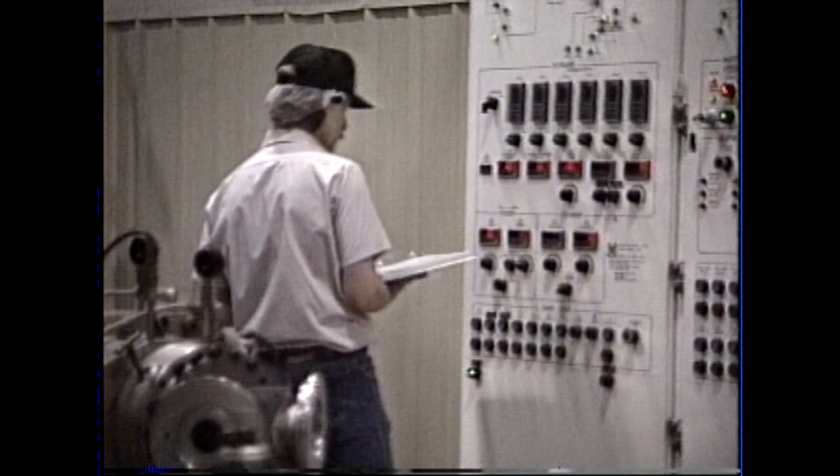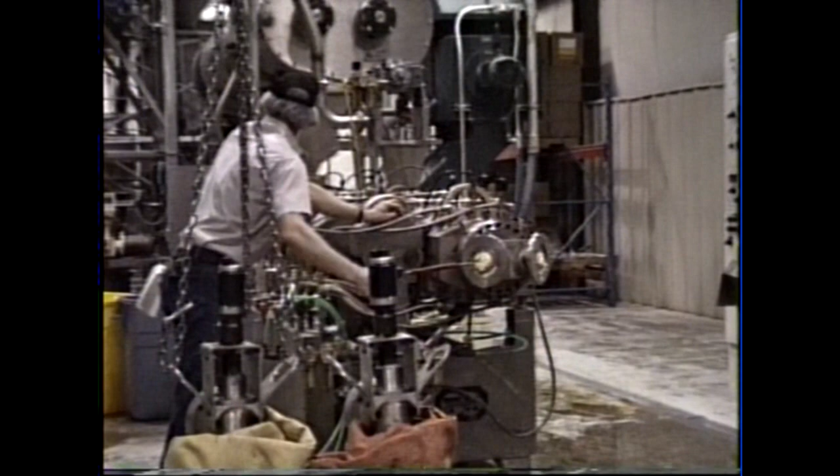I like to watch their buttons. If they were in G-strings, it'd be a lot better.

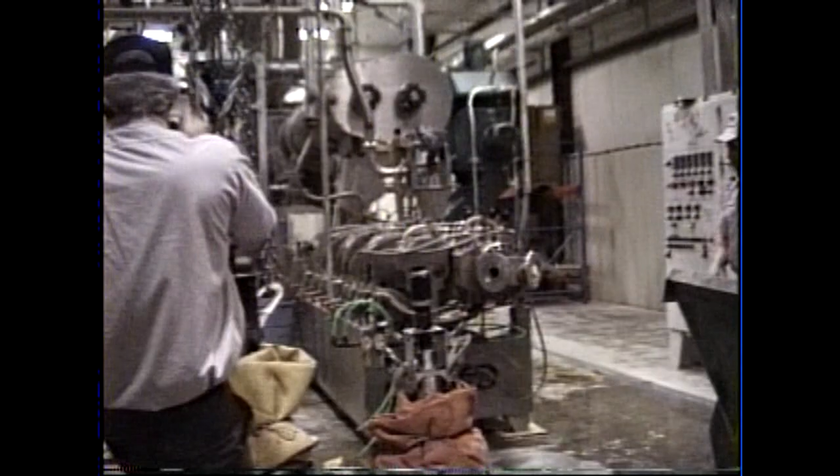Yes. You just keep standing there. Why you gotta take pictures of this? Does he have voices?

Oh, my arm's about ready to fall off. Well, you could yell at him and work a little faster. I think they have to go slow so they can. This is kind of a demonstration case for Mark. Because my arm's really gonna fall off.

Welcome to Wenger Manufacturing, the world authority in extrusion cooking systems. Wenger Manufacturing, a family business spanning 60 years and 3 generations. A business bringing together a workforce dedicated to developing and building only the highest quality equipment. Wenger Manufacturing, where service to customers is just as important as the equipment we build.

At Wenger, the difference begins in our technical center. It's the largest extrusion research facility in the world, with 2 pilot plants and a working laboratory. Our tech center is in use 300 days a year for research to make new products possible.

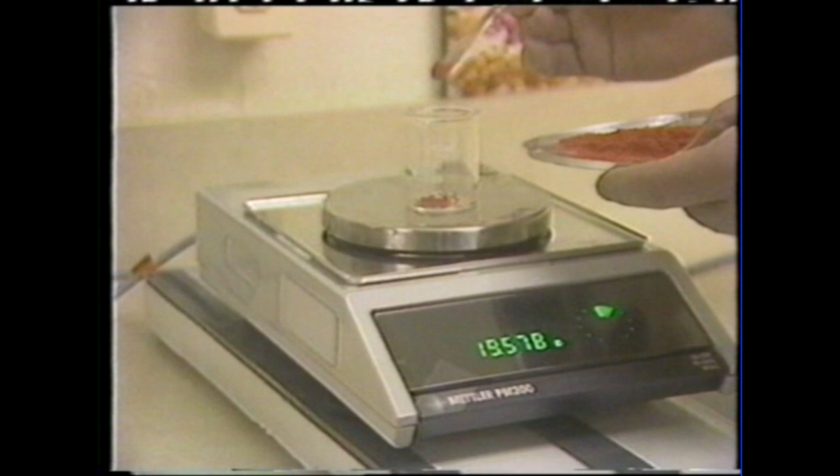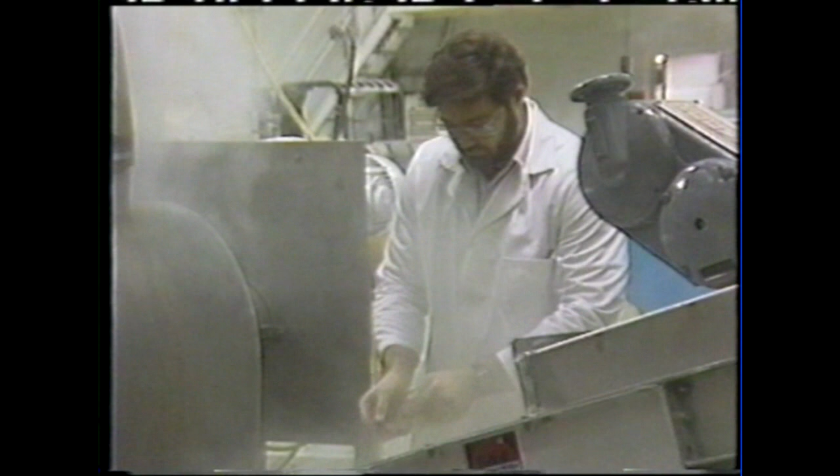We test new ideas that we are developing, and we demonstrate the practicality of your ideas too. Our technicians analyze your particular extrusion needs and then apply our state-of-the-art technology in test runs. We actually produce product for your evaluation, and we do it in quantities that help you make informed production decisions. Test runs also allow us to design a total system specifically for you as you develop the most marketable and profitable products possible.

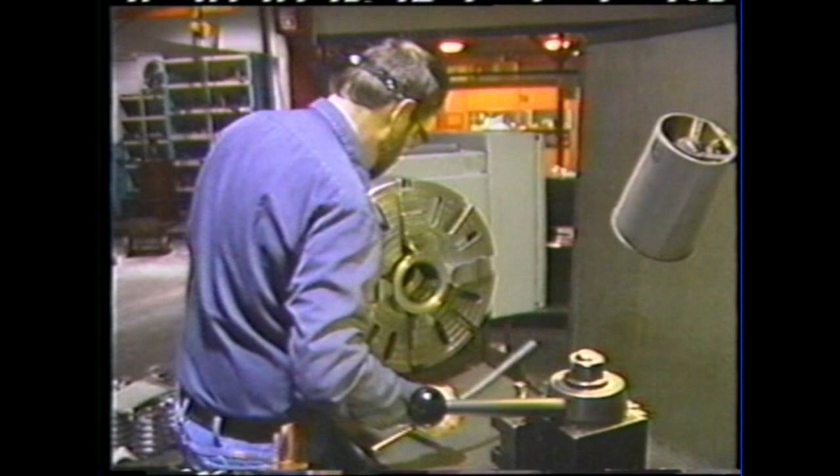We're in the business of advancing the technology of our science. No one knows the extrusion business better than the people of Wenger, and no one can better teach you how to use an extruder. We believe each customer is different and has uniquely different needs. We build the best possible system to satisfy those needs. Only Wenger builds both twin screw and single screw extruders.

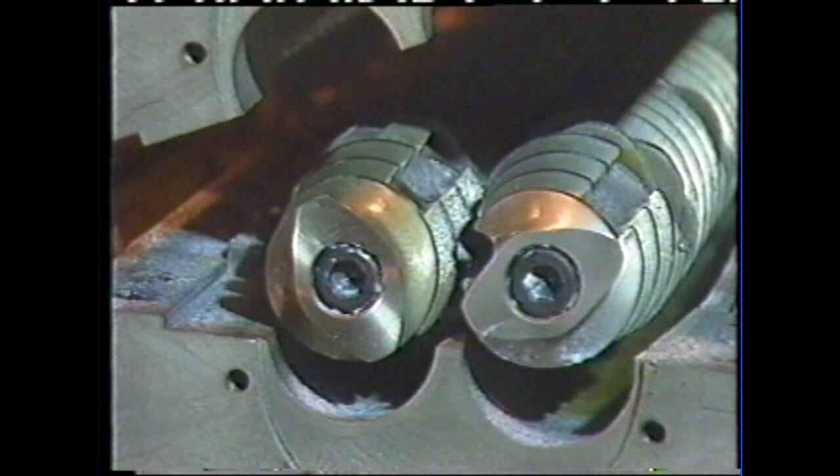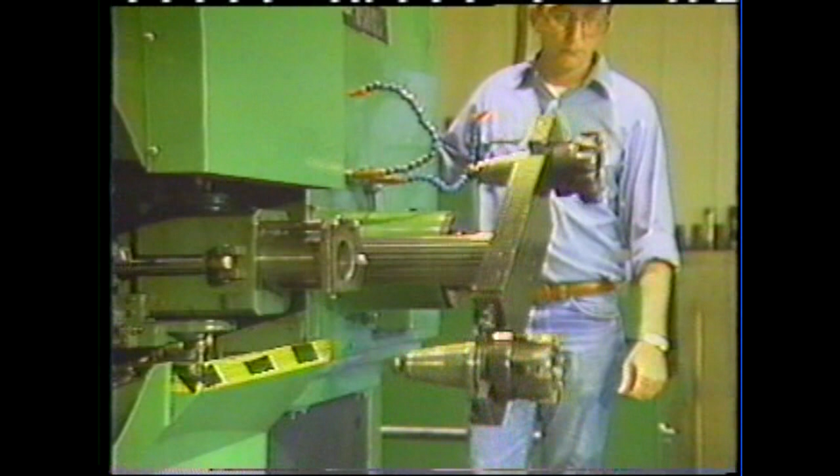At Wenger, we specialize in single supplier responsibility. We build the whole system for you. Our engineers have hands-on experience. They combine sound engineering concepts with the latest production techniques. Our machine operators, our craftsmen, and our assemblers carefully produce every major component.

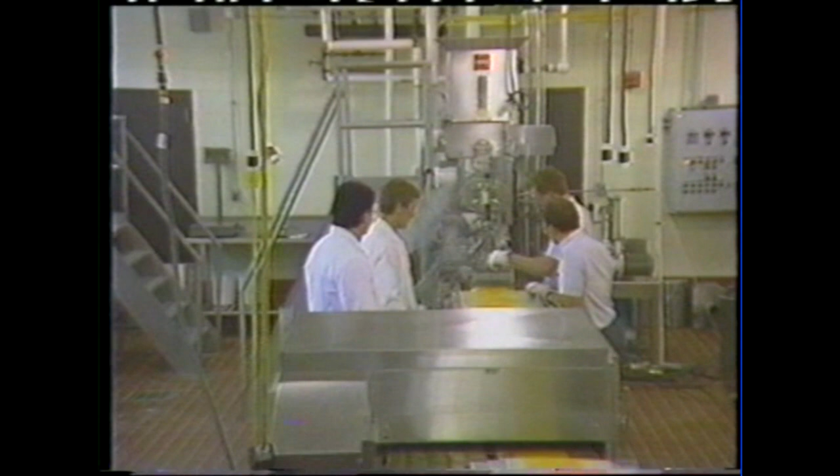Computerized machine tools and the personal commitment of all our employees assure quality. When the name Wenger goes on, our customers know they have the finest state-of-the-art extrusion equipment on the market. But the Wenger commitment does not end with building your system. The service we offer puts us head and shoulders above the competition.

We provide both pre- and post-installation engineering support. A Wenger technician is with you for the installation of your system. We train your operations staff, and we stay with you until your capacity and product quality expectations are reached.

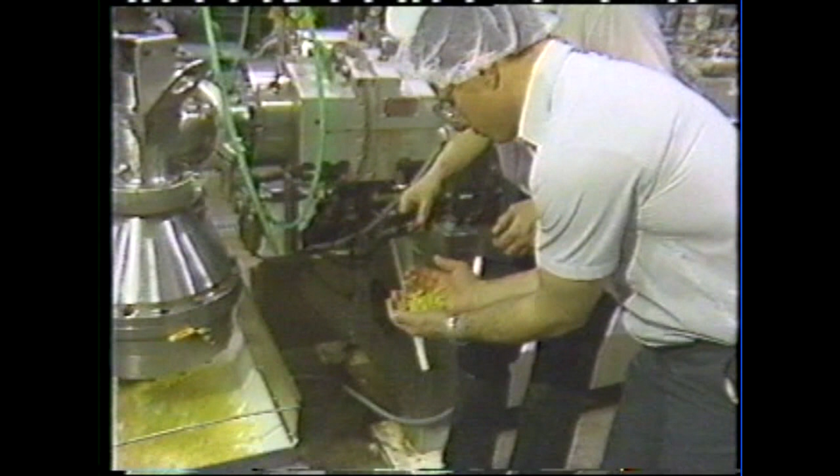We care about the systems we install, and should something go wrong, we take care of it, period. At Wenger, we maintain a parts inventory for equipment that hasn't been manufactured for more than 2 decades. Remember, at Wenger, we developed the concept of extrusion cooking.

The most important advances in extrusion cooking have come from Wenger, and you can be sure the advances of tomorrow are being engineered at Wenger today. That's why we're certain we can help you develop new products and produce your current products more efficiently.

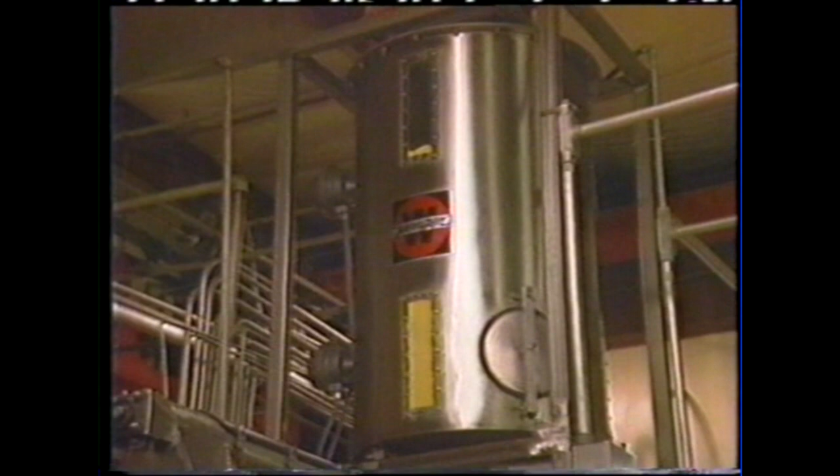The heart of the Wenger system is the high-temperature, short-time extrusion cooking system, a revolutionary system that Wenger pioneered. The system consists of a live bottom bin for mixed raw materials and a variable speed metering or feeding device that feeds the raw, dry mixed ingredients uniformly and continuously at the desired flow rate.

A patented preconditioning system combines liquids, steam, slurries, or any combination with the dry ingredient mix. An extruder assembly feeds, kneads, and cooks the dry or pre-moistened process material. A die provides restriction and shapes the final product, and a cutting device cuts the product to the desired length.

Of course, the entire system may be computer controlled, from the introduction of raw materials to the output of the final product. You expect no less from Wenger.

It's Wenger's system and experience that makes us the industry leader and gives us the know-how to revolutionize the way pasta can be produced. Wenger systems are engineered to be durable and efficient, and they produce product in just a fraction of the time needed by traditional methods.

And the Wenger system can use a range of wheat flour. That gives you greater flexibility in producing your product.

Pasta the Wenger way is pre-cooked. To make it table ready, it needs only to be rehydrated. That usually takes just 2 to 6 minutes in hot or boiling water or in a microwave.

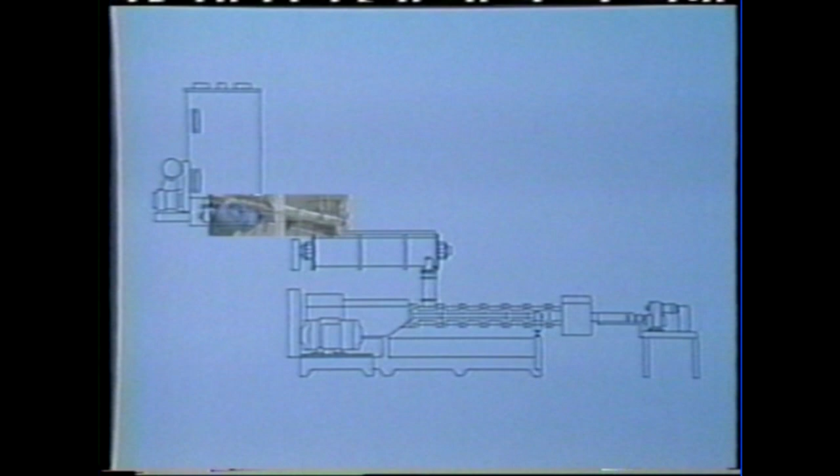Our system begins with the live bottom bin. It holds and maintains a predetermined mix of raw material for the cooking extruder. The variable speed screw feeder provides a uniform, continuous flow of mixed raw material from the bin to the preconditioner. The screw speed is accurately controlled, and can be manually set or computer-driven.

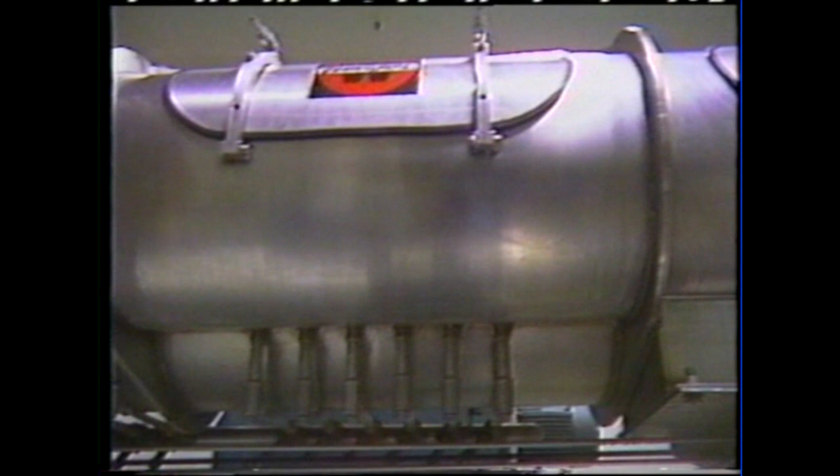Our preconditioner is a cost-effective way of tempering raw materials by direct steam and heated water injection. This patented system provides improved mixing and allows you to control the mixing time of the raw materials before they enter the extrusion cooker.

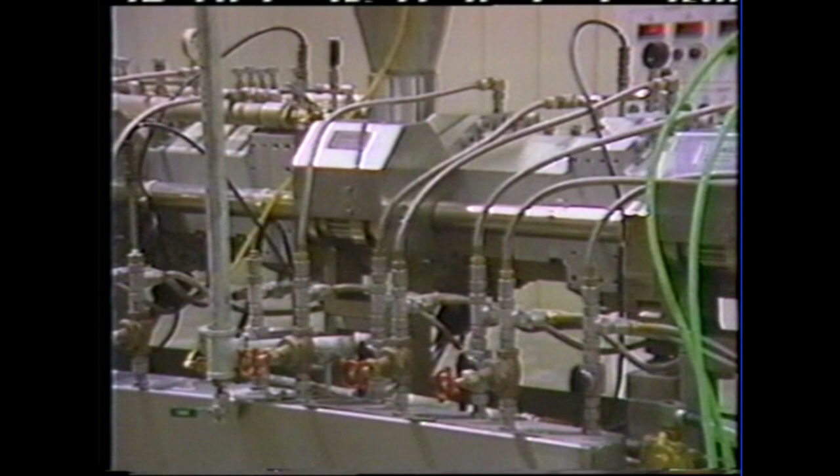Our cooking extruder can perform several functions very quickly. Preconditioned raw material is carried into the extruder barrel, where it is worked into dough and rapidly heated. Dough is folded, kneaded, and compressed, then pushed through a die plate which determines its shape and size. Due to the unique nature of the extrusion process, cooking and drying time is drastically reduced compared with traditional systems.

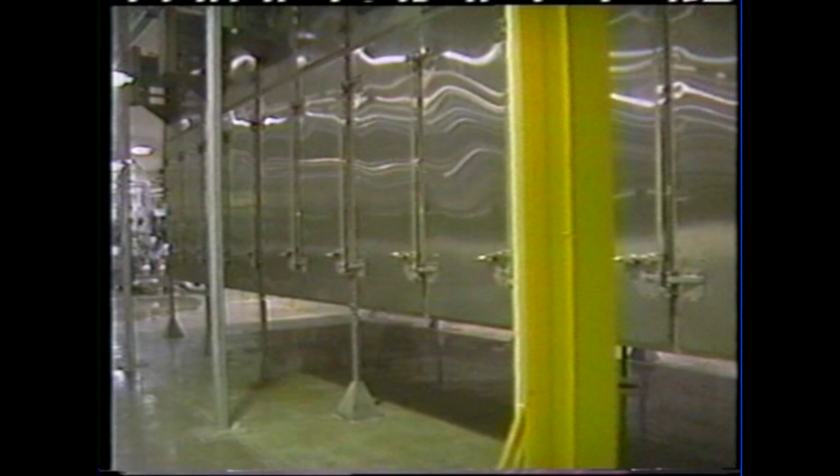All parts of the system are designed to work together for you. Compare the Wenger system, and you'll see it's less complicated, requires fewer people to operate, takes less floor space, and requires lower capitalization.

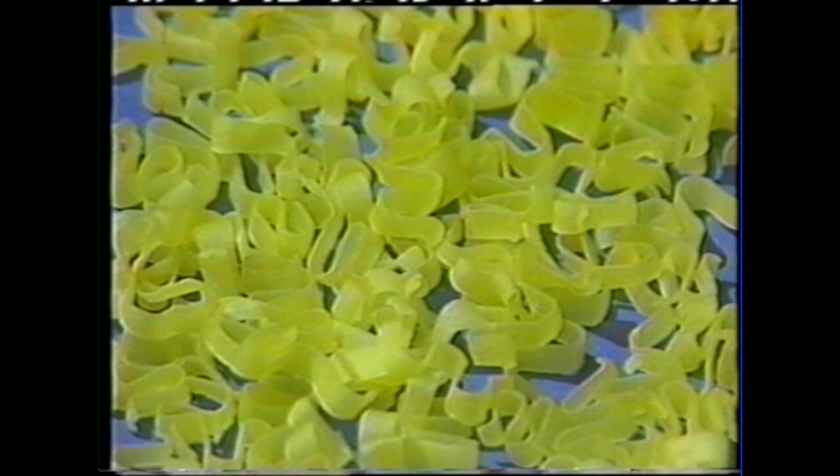While traditional systems require high-quality flour, a long processing time, and high capitalization, the Wenger system accepts a much wider range of flours, plus reduced drying time. Best of all, pasta from the Wenger system requires just a fraction of the time for the consumer to prepare.

Wenger offers versatility, economy, and flexibility for you in quick cooking pasta production.

Wenger is recognized worldwide. In fact, Wenger systems are in use today on almost every continent. Our commitment to our customers means we have offices in Europe and Asia. Wherever you are, we work with you in total confidence from concept until your system is installed and working at its promised capacity.

We are known for taking new ideas, developing those ideas, and building new machines that produce new products. The Wenger Research and Development Team is tops in the industry, and we get the job done quickly.

Well, we've done many years of research with Wenger equipment. We find it very durable, very flexible. And another thing we like is their response to our needs. Anytime we've had problems, we find they've been very helpful, and our relationships are very warm. Have a problem? A quick phone call and replacement parts are shipped promptly.

Our vast inventory of parts means less downtime for you.

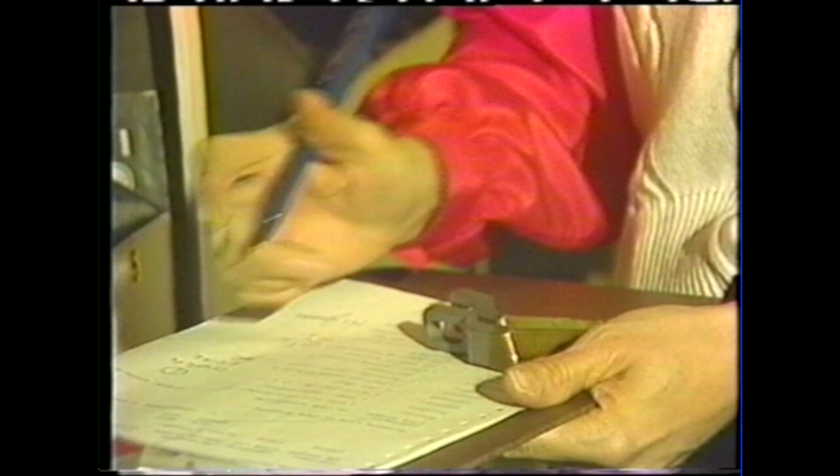Our Wenger TX52 twin screw extruder has been in our facility for about 2 years now. It's our most used piece of equipment. We use it primarily for providing assistance to the food industry in Nebraska and nationally. It's a great piece of equipment for that type of research.

We can get up to 17 different formulations or variations through the machine in a day. It gives a great deal of latitude and a great deal of information in a short period of time to our clients. One final thing, the Wenger Corporation has provided technical assistance that enables us to serve our clients and use this piece of equipment as it should be used in this kind of atmosphere.

That's it. That's the Wenger story. Now, what can we do for you?

Our commitment is we care. Our success comes not only in the systems we develop and build, but also in the success that Wenger equipment helps you achieve. At Wenger, we're ready to help you make success happen.

After adjusting the set points on the Mokon temperature controls, I turn them back off until a later time.

Brian is now turning the steam gun on, which we will use to preheat the dies and the bells. We'll usually leave the steam on the bells for about 5 minutes on each one, just to preheat them to the point where they feel fairly warm to the touch, but not so hot that you can't keep your hand on them.

This time I'm also adding air to the top of the water pump stainless steel cylinder. By adding air to the top, it will drive the piston down to the bottom, and this will help the water pumps and the micro motion machines, which sense the flow of the water and regulate it, be more accurate.

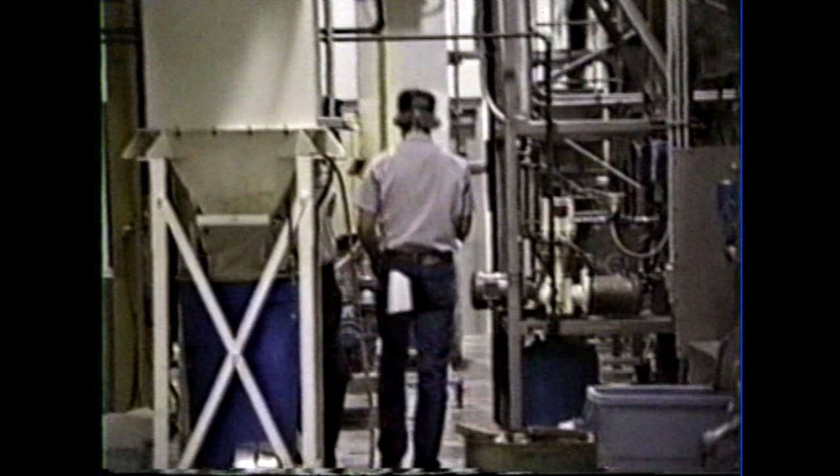I'm now going into the electrical room to turn on the main DC power, which actually operates the 250 horsepower DC electric motor that runs the extruder. It has a separate switch control in the electrical room.

I make sure that the extruder water pump valve underneath the cylinder is set on water pumps rather than backwash, and we're just about ready to start the extruder.

With clipboard in hand, I will double check the set points right now on the feed rate for the cylinder.

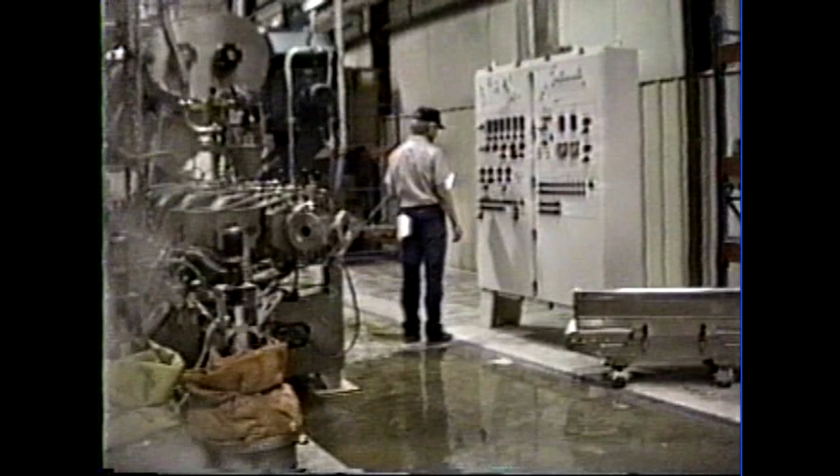After about 5 minutes of mixing product in the cylinder, when it reaches normal running conditions - temperature and moisture wise - then we will be able to divert it back, change the diverter chute, and drop it into the extruder to run product through the extruder.

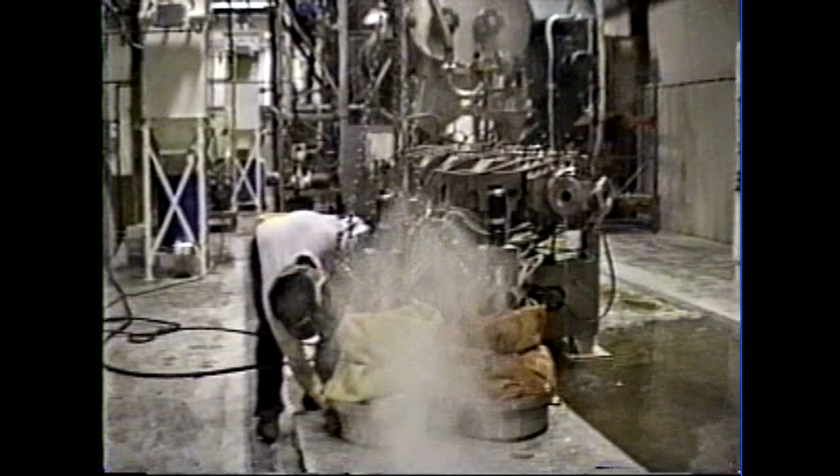After putting air pressure on top of the piston to blow it down to the bottom of the cylinder, I went just now and checked to make sure that the air, after pushing the piston to the bottom, was relieved, so there was nothing but atmospheric air pressure on top of the piston.

We have product coming out of the diverter chute into the blue garbage can.

At which point it is too hot to handle with your bare hands and wet enough that it sticks together when you pinch it with your fist. It does not crumble apart like a dry flour. Then we'll be ready to move the chute back to the extruder and push it through the extruder.

I now have my left hand up on the diverter switch to move the chute, and my hand on the RPM pot for the extruder. Once we move the chute over to the extruder, we slowly turn it up from 24 RPM up to usually like 160, which for most conditions is our normal running speed.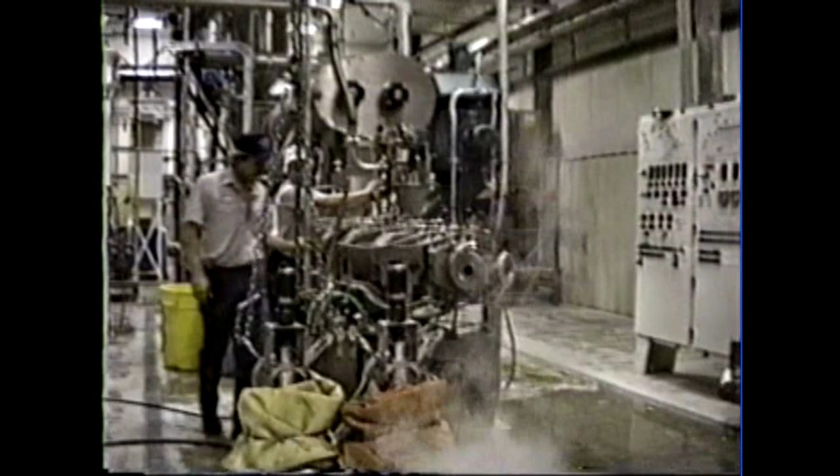As you can see, after about 1 minute, we do have wet product coming through one side of the extruder, and before long we'll have a drier product coming through both ends.

At this point, the product in the cylinder will actually be wetter than the normal running procedures because I will be adding about an extra 50 pounds of water into the cylinder during setup mode. The same with the water going into the extruder. At this time, I'll usually put in an extra 50 to 100 pounds of water to keep the product running wetter than normal running conditions.

Right now I'm adjusting water going to the extruder. As you can see, the product in the extruder is slowly changing.

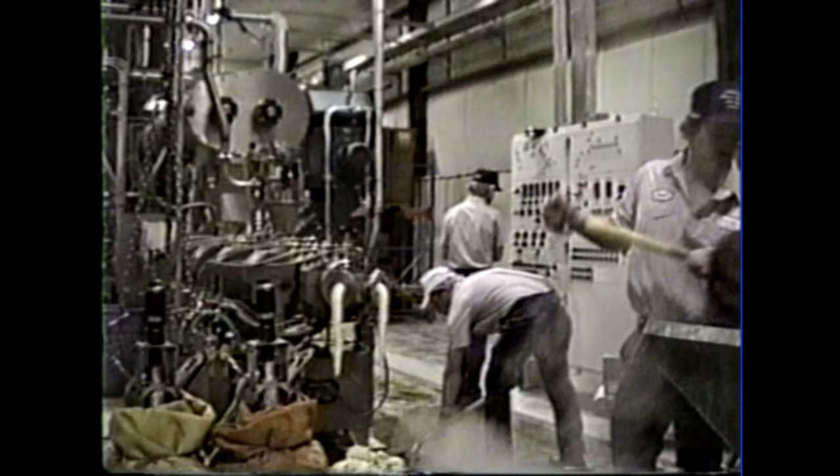This time, Dean is looking for any black specks that could be rubbing off the walls or the screws of the extruder. We usually keep our eyes on this. If there's black stuff breaking off the walls, we will keep running product through the extruder until we see that it is definitely being cleaned out and the product doesn't contain much, if any, foreign particles.

The product is now stiffening up and warming up to the point where it'll break off in chunks. We will run this way for just a few minutes, and then we will shut everything off and attach the dies.

Now I'm shutting off the extruder and the cylinder, and the water and steam going to the cylinder. At this point in time, we will begin to get ready to attach the dies to the extruder.

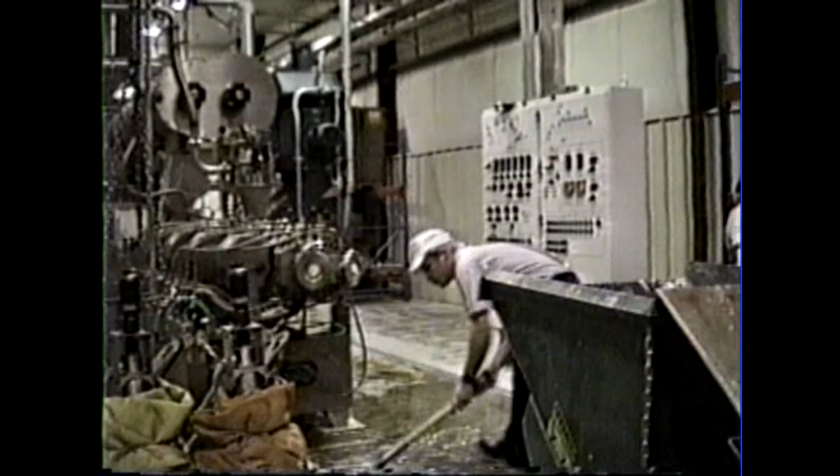Before we attach the dies to the extruder, one must use a power washer and blow the plugs out of the end of the extruder.

If the plugs are not washed out of the end of the extruder where the throttle plate is, and one waits a few too many minutes and then attempts to run the extruder with the dies attached, product will not go through the throttle plate, but will go up through the stuffer, and one can plug up the stuffer and also plug up the vacuum tube. So when the throttle plate is attached and in place, you definitely have to stick the power washer inside of the 1-inch throttle hole and definitely flush it out.

At this point in time, the cylinder is off, the steam and water to the cylinder is off, and the water is off going to the extruder. The steam has never been turned on to the extruder yet at this point.

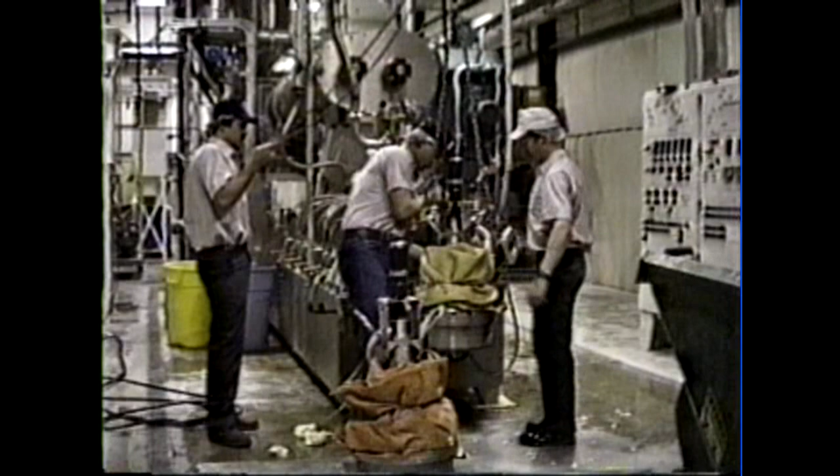The clamps that hold the die to the extruder must be put on in only one direction. They do an important job, and one must be assured that they are tightened to about 100 foot-pounds on each side, as to prevent the actual die from getting blown off the end of the extruder with the extreme pressure.

At this point in time, I am adding the knife to the bottom of the die, which is used to cut the product to a specified length.

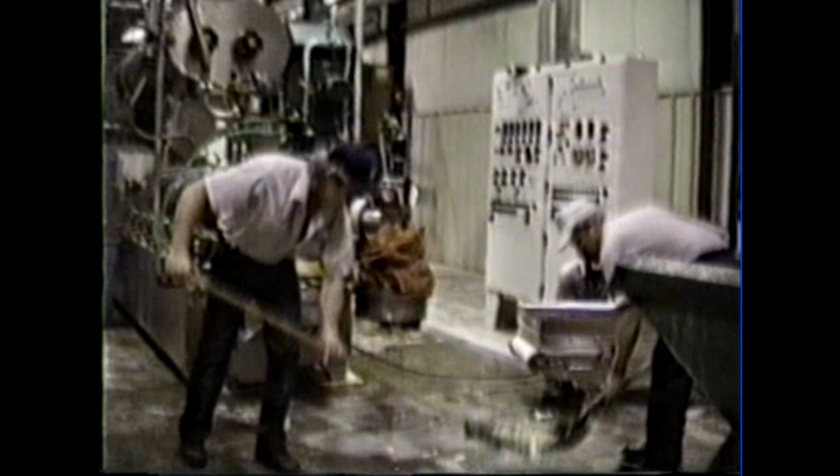At this point in time, all the dryer settings should have been preset. So at this point, we will be able to turn the dryer on, all the motors and fans, and it will be ready to function immediately.

Also at this time, we'll turn on the conveyor belt, which slides under the die. We will also turn on the knife switch that actuates the knife blades, adjust the air accordingly so they are running at approximately the right speed for the conditions and product we are trying to match.

Excessive speed on the knife blades will cause excessive wear. I usually don't try to over speed the knives until we're actually running product through the die and know exactly what length we have to have.

At this point in time, I've just turned on the cylinder, the water and steam going to the cylinder, and I'm adjusting that to match the set points for this specific product.

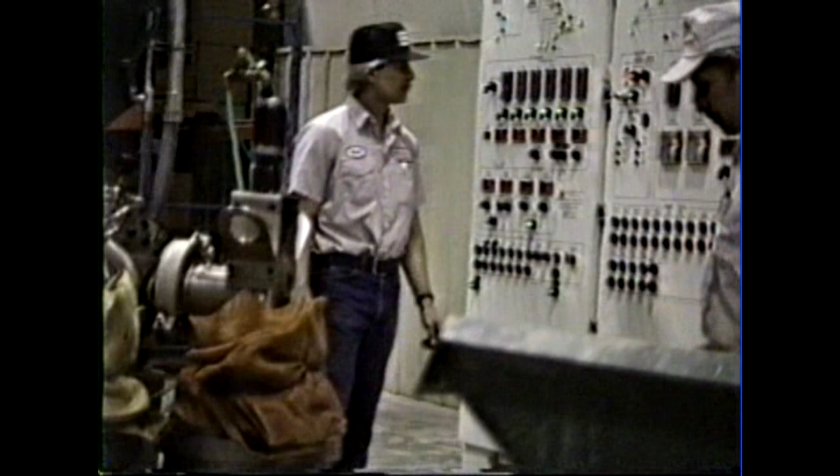Now I'm adjusting extruder water and cylinder water and steam. Now I'm opening the steam valves and the steam ball valve, which lie on top of the extruder.

At this point in time, I have not turned on the vacuum. Anytime now, one can turn on the vacuum safely, without sucking product up into the vacuum tube, once we have the product coming well out of the dies, flowing well.

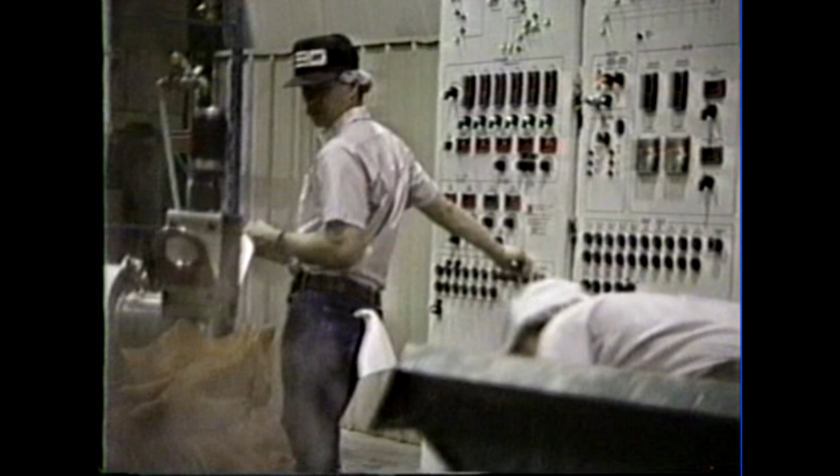I'm turning on the vacuum right now. When one turns on the vacuum, do check with the vacuum gauge on top of the stuffer to make sure that you do have an open vacuum line and the vacuum shows on the gauge, usually anywhere from 10 to 12.

At this point in time, we have shoved the conveyor belt underneath the dies, and once you do that, one must check directly and immediately up to the airlock to make sure the product has flowed through the system correctly to the dryer, through the airlock, and into the shaker bed above the dryer.

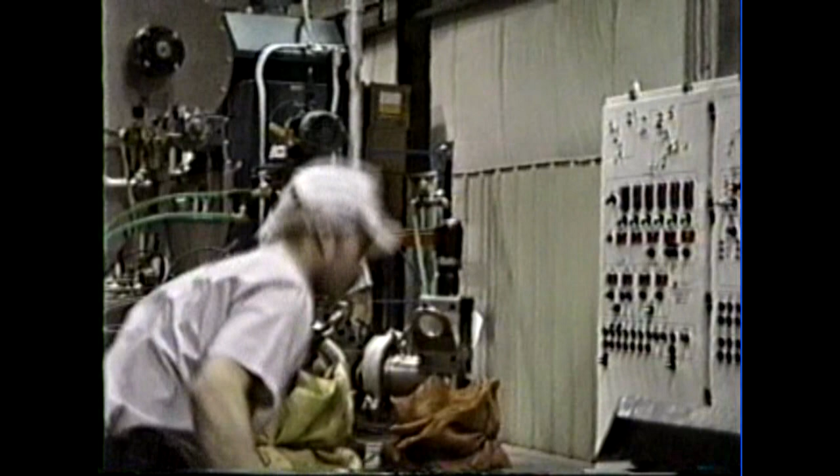At this point in time, the biggest thing is to keep track of the readouts to make sure all the set points and readings match up correctly. Then watch the product coming out of the dies and adjust knife speed for length. When the product matches the specified length and shape, one can save the product at the other end.

The speed of the turn on these twists will all be the same. They should be approximately the same length and shape.

This is 4 hours after we began running. As you can see, a lot of dancing with the noodles. They're not coming and flowing straight down out of the inserts. They definitely have a problem.

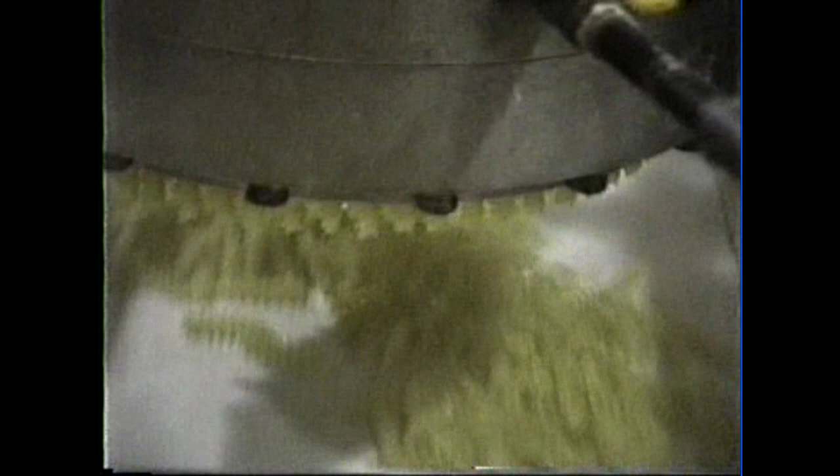Not a good sign. The dancing is a sign of worse things to come.

Here we have a picture of a mess to its fullest.